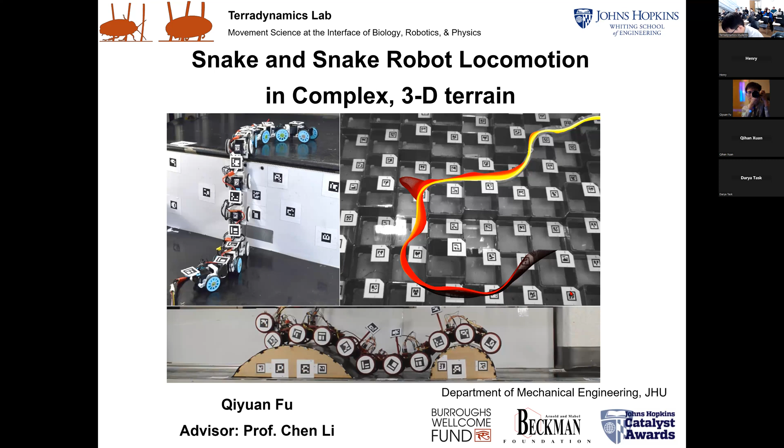And today I will defend my dissertation entitled "Snake and Snake Robot Locomotion in Complex 3D Terrain." So the reason we study snakes is because they are excellent locomotors in almost all types of complex 3D environments. And because of this, snake robots are very promising platforms to perform critical applications in these complex 3D environments, such as search and rescue, building inspection, environmental monitoring, or extraterrestrial exploration.

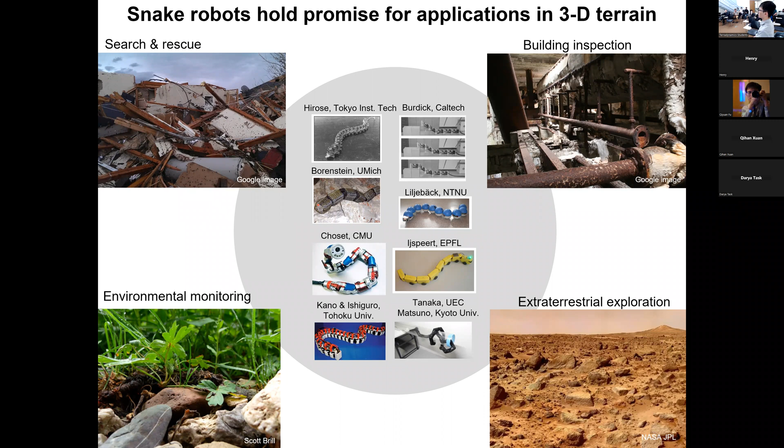Their locomotion on smooth flat surfaces has been well studied. The most famous type is called lateral undulation. The snake simply propagates a traveling wave down the body to move forward. And the secret to this type of locomotion is a special property called force anisotropy. For example, on a flat surface, there is a special anisotropic friction between the snake scales and the ground, so that the forward friction is smaller than the lateral and the backward ones.

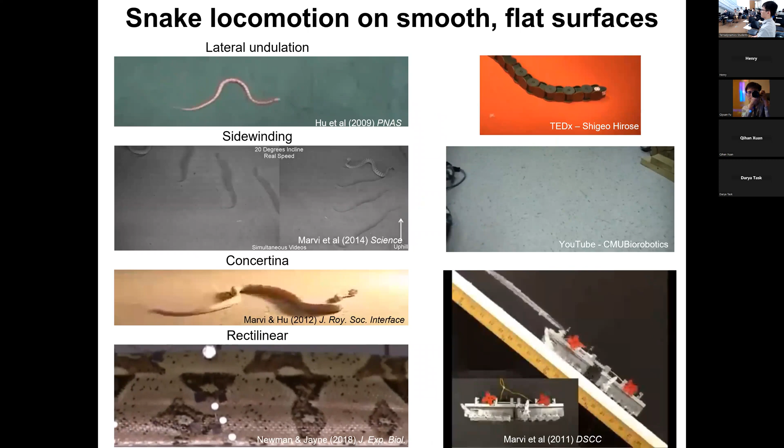And because of this, the sum of force applied to the ground by the snake points backward, so that it can move forward while doing this propagation. But they also have other ways to generate this force anisotropy, which I will introduce later. So aside from lateral undulation, they can also use alternating static contact with the ground to move forward. For example, sidewinding, concertina, or rectilinear. And because of these inspirations, snake robots can also use similar modes to traverse smooth flat surfaces relatively well.

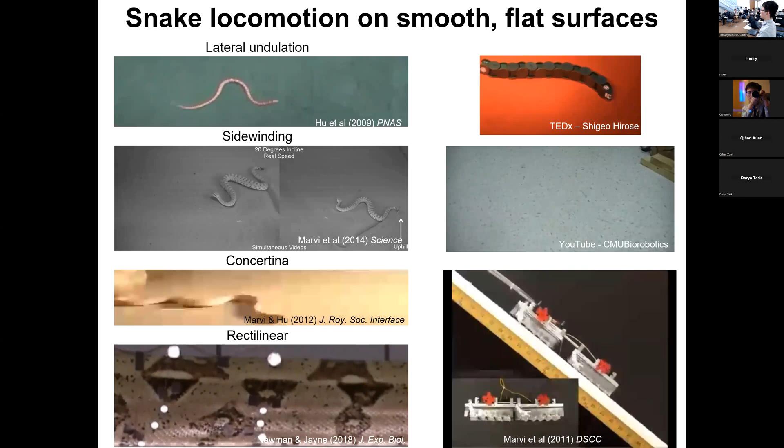And when there are vertical structures available on these flat surfaces, they can additionally utilize them to improve their performance, because they can easily get larger anisotropic force by pushing against these vertical structures. For example, when they are using lateral undulation, they can just push against these vertical posts. And when they are using concertina in a narrow tunnel with two opposing walls, they can brace against these walls for a firmer static contact, and then extend the other part of the body forward to move forward.

And because of this, the principles have been well understood and applied to many snake robots that allow the robots to traverse similar environments very well.

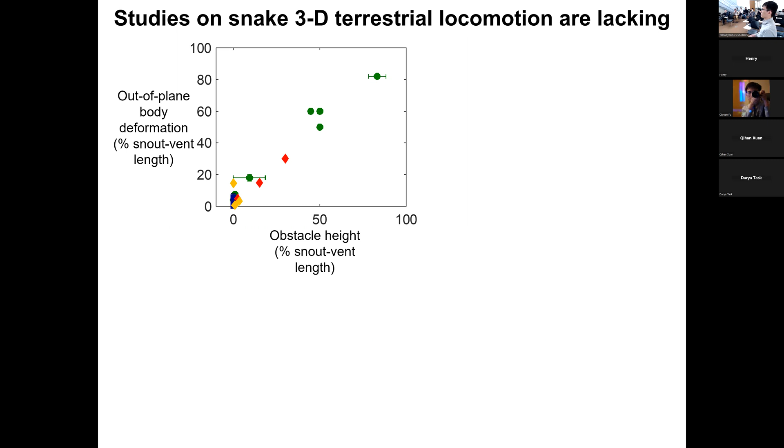However, the studies on the snake's 3D terrestrial locomotion are still lacking. Most of the previous studies focus on their terrestrial locomotion on flat surfaces, and the snakes have very small out-of-plane body deformation, usually used to reduce the friction between the body and the ground. And those that have quantified very large out-of-plane body deformation really are for their arboreal locomotion.

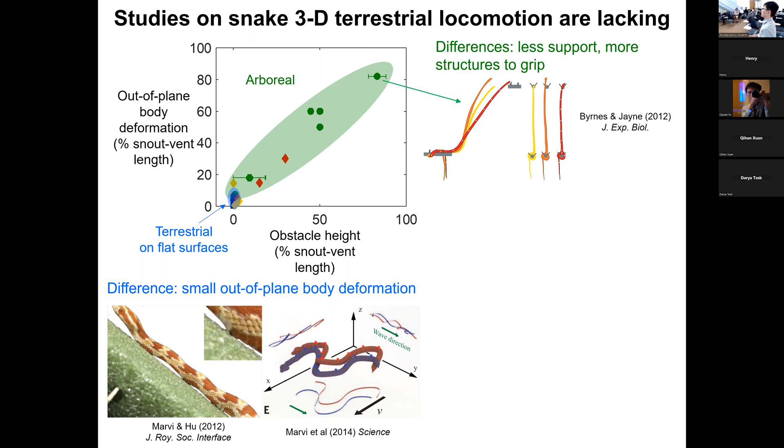And these environments are very different from the terrestrial ones, because there are fewer structures for them to support the body weight, but also more thinner structures for them to grip or wrap around for propulsion or stability. And as for the terrestrial locomotion, there are not so many studies. There are only a few from our lab and our collaborator, Henry Astley's lab, that study how they use their 3D body bending to traverse these kinds of environments with large height variation.

So because of this lack of understanding, current snake robots are still struggling in this kind of 3D terrain. Most of them use geometric motion planning dedicated to specific environments, for example, pipes or ladders, so they don't have the versatility to traverse other types of environments.

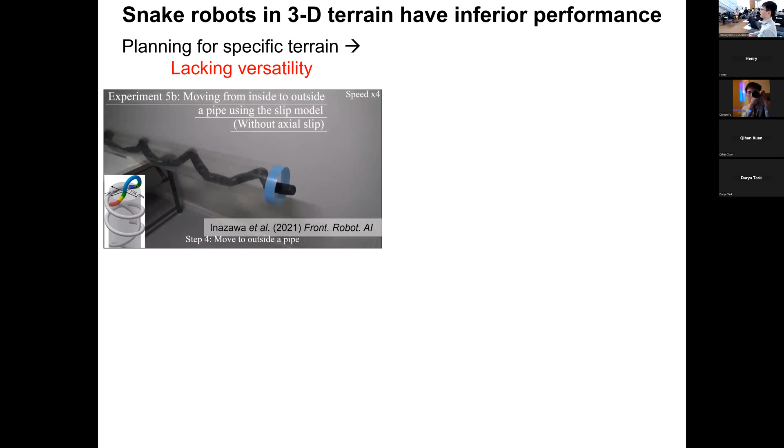And some robots are able to adapt to different terrain using controlled compliance to adapt to the height variations. However, because they are still using the gaits designed for flat surfaces for propulsion, you can see that even the best of them are still experiencing very severe slipping, and it seems that the propulsion is not large enough to overcome the resistance there.

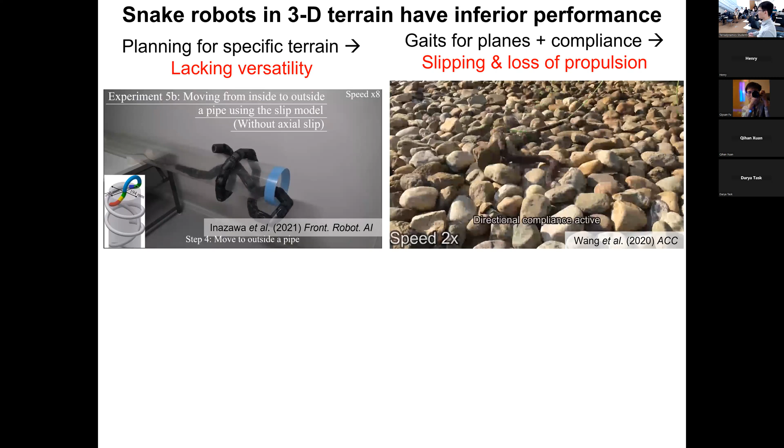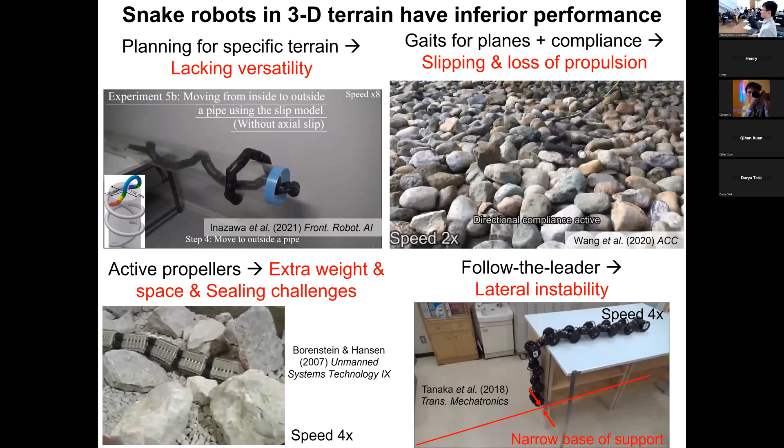So what does the additional vertical body bending induce when they are traversing 3D environments compared to their 2D locomotion? One point is that because the center of mass is raised up, there is more challenge to maintain stability. And also because a large part of the body is used for vertical bending, if they are still simply relying on lateral bending to provide propulsion, because of the shorter body section, there will be less propulsion generated, and maybe that is not sufficient.

So the overall goal of this dissertation is to understand how the vertical body bending can be used stably, and also whether it can be used for propulsion generation. And to approach this question, we studied both snakes and snake robots, in which we use snake robots as amenable physical models that allow us to test hypotheses from the observations in animal experiments, while the animals can also inspire the design of the snake robots.

And we challenge these models in 3 representative 3D environments: a large smooth step, an uneven terrain made up of blocks of random heights, and also large bumps. All of these 3 have very large height variations.

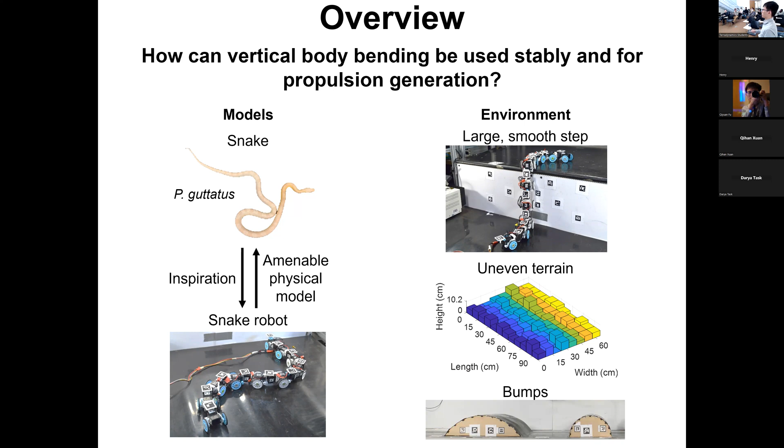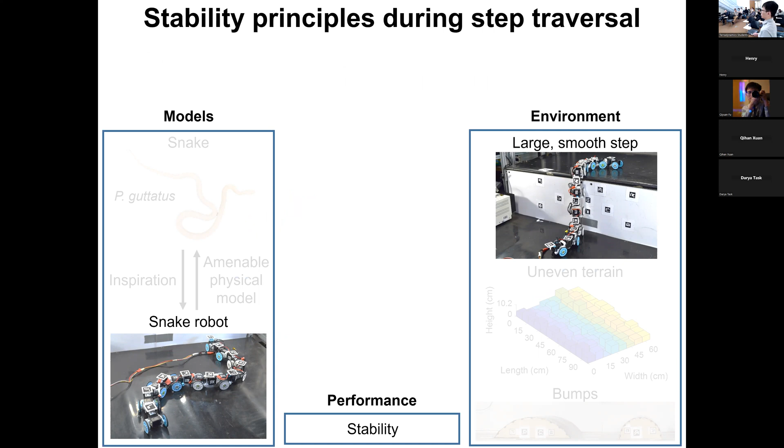And our first project studies the stability principles during the step traversal. So we challenged the robot to traverse this kind of large smooth step and see how stable it is. And what we found is that the instability increases with the amplitude of vertical body bending. We didn't test the control policy for this one, but we found that a passive mechanism of body compliance can increase the stability by improving the contact between the robot and the terrain.

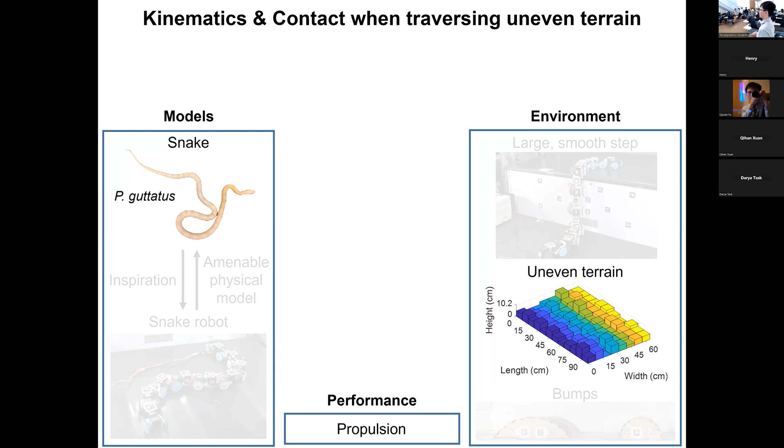And then to better understand how snakes traverse more complex 3D terrain, we tested corn snakes, a generalist snake species that lives in a variety of environments, traversing this kind of uneven 3D terrain. And then we measured their kinematics and their interaction with the terrain.

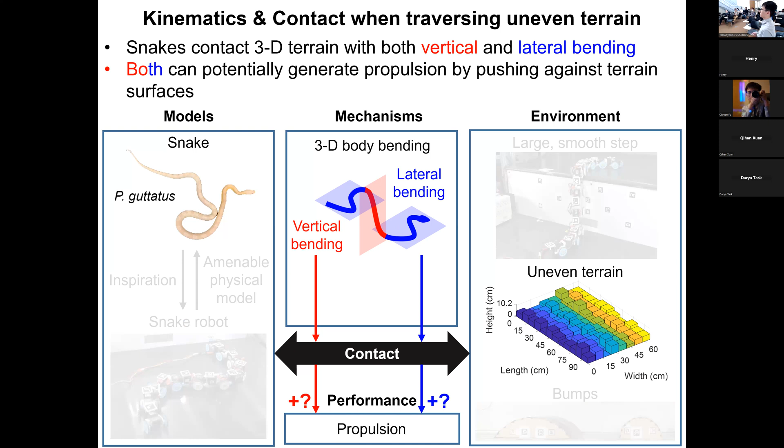And we found that they can contact the 3D terrain not only from lateral bending as previous snake robots do, but also using the vertical body bending. And there is also strong evidence that both these 2 types of body bending can contribute to propulsion by pushing against the terrain surfaces.

And finally, to understand how we can use vertical body bending to generate propulsion, we use a snake robot as a model and let it traverse these large bumps using vertical body bending only. And we found that by propagating a shape down the body, it can generate sufficient propulsion to overcome resistance such as friction or other external forces just by pushing against this uneven terrain.

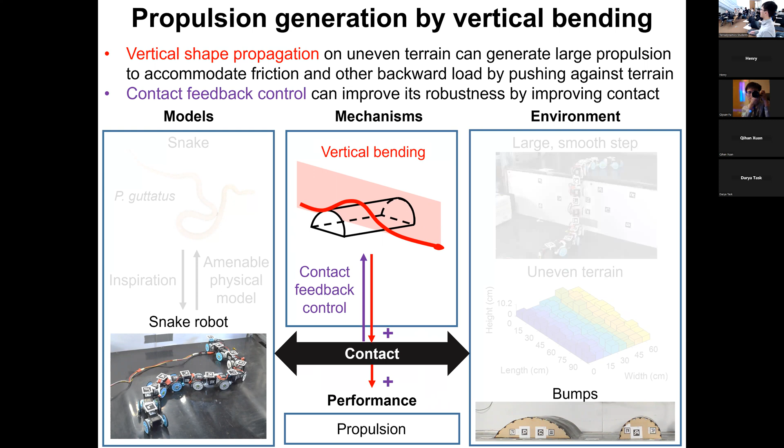And when we add contact feedback control to the robot, it can improve the robustness of this strategy against unexpected perturbations that cause loss of contact, by regaining the lost contact and then maintaining the propulsion and the success rate. And then I will first talk about our first project, which studies the stability principles during step traversal.

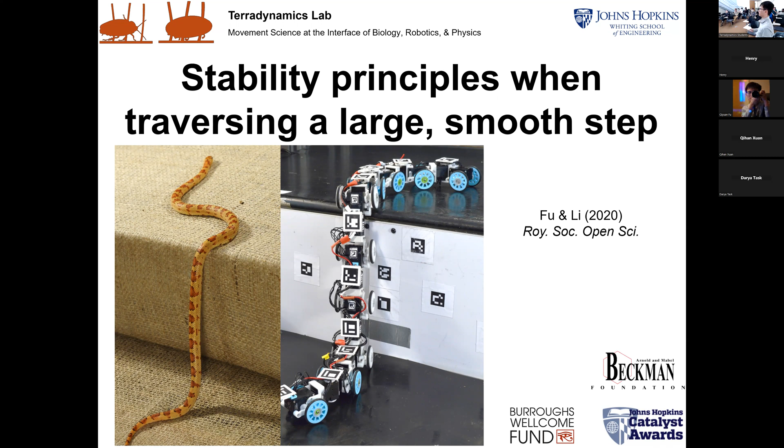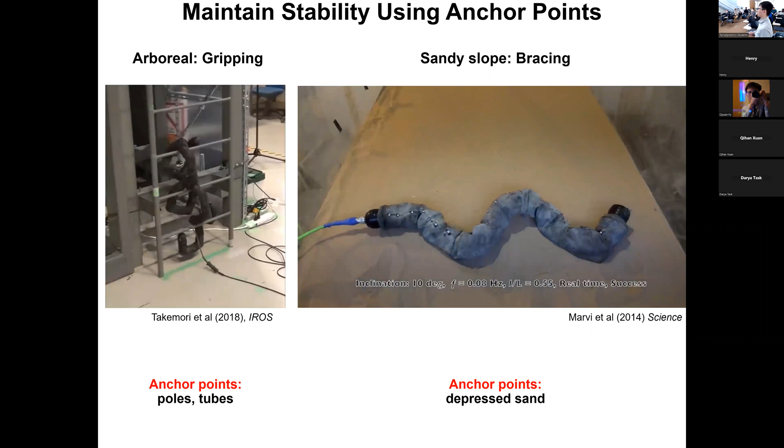And as I mentioned just now, on flat surfaces, snakes are able to move forward using near 2D body bending, which is inherently stable because of the very low center of mass. But when they use 3D body bending, it causes some stability challenges, as you can see on this robot using sidewinding to move up a slope. And in some environments, they are able to maintain stability using anchor points. For example, in arboreal environments, they can grip these horizontal rods for stability. And on this sandy slope, they can push against the depressed sand for stability.

But there are also environments where the obstacles are too large and smooth for them to gain such anchor points, for example, over a large boulder or over a fallen tree, but still snakes can traverse these environments. And how do they do that? Our previous work found that they are able to use a partitioned gait to traverse these kinds of environments. They tested it using kingsnakes, a kind of generalist snake.

And the partitioned gait is that they partition the body into 3 sections. The anterior and the posterior sections use lateral undulation on horizontal surfaces for propulsion, and the middle section cantilevers in a vertical plane to bridge the height difference. And when the snake is moving upward, these entire patterns travel down the body.

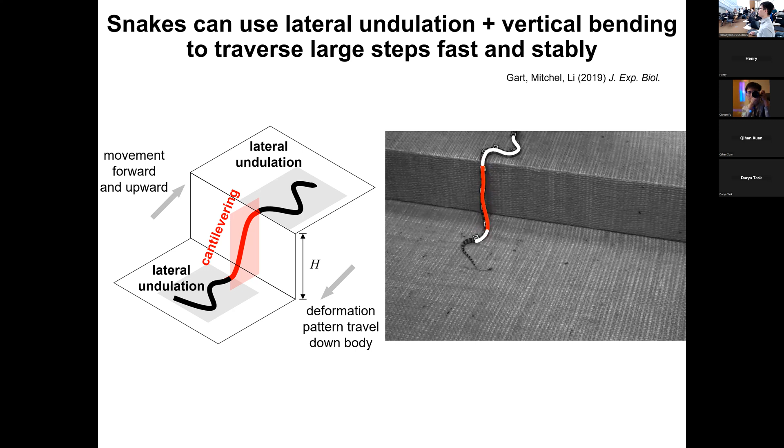And because of this combination, they have a much wider base of support compared to most of the previous snake robots that have tried traversing similar terrain. This allows them to traverse much faster than the previous snake robots, and also with 100% stability in all 120 trials.

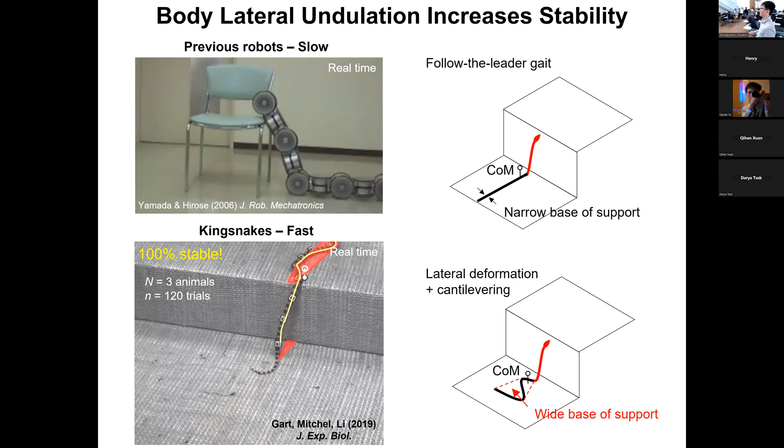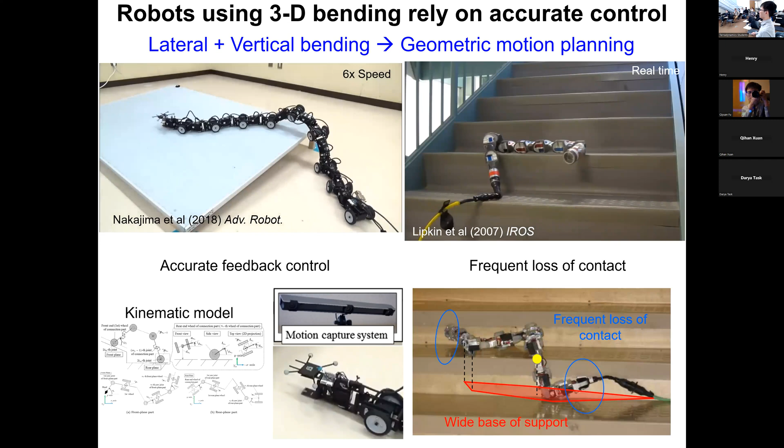And there are indeed some robots that have tried combining lateral and vertical body bending to traverse similar environments, but they rely on very accurate feedback control to maintain good contact between the robot and the terrain, even for a very low step. Otherwise, they will frequently lose contact with the terrain.

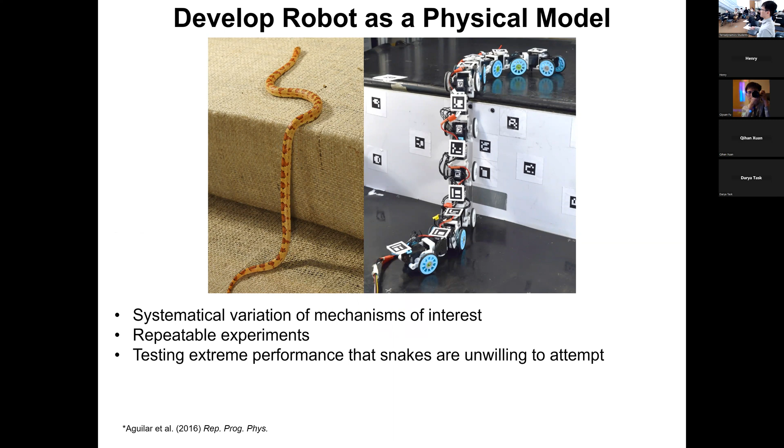And to better understand the stability principles for these kinds of locomotors when they're traversing this large smooth step, we developed the robot as a physical model. As I mentioned, this has the benefit of allowing systematic variation of mechanisms of interest, for example, the controllers or some other mechanisms that we mention later. And this allows us to do repeatable experiments and also test environments that the snakes are unwilling to attempt. For example, for very high steps, we can't get the snakes to traverse them.

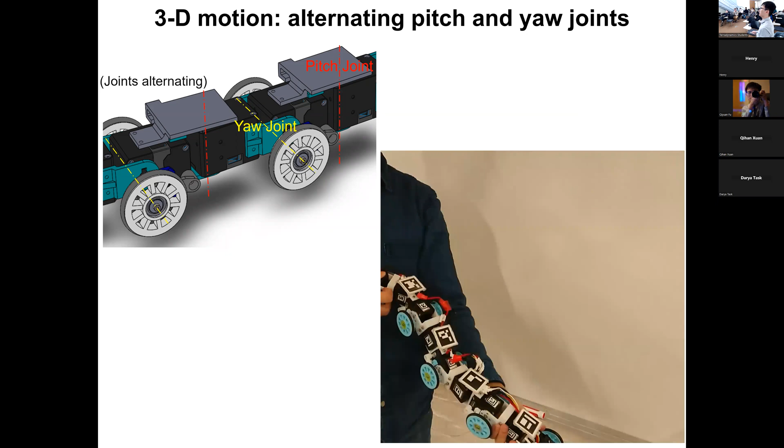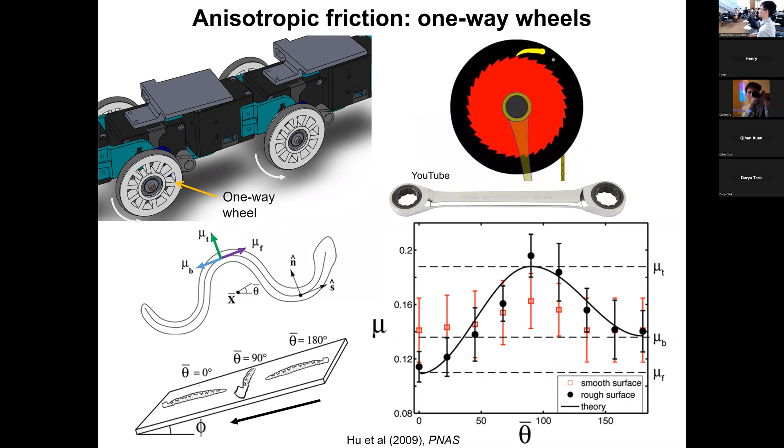And this also provides direct examples of future application and many other benefits, which recently have resulted in a large number of discoveries about animal locomotion. So the snake robot we use has alternating pitch and yaw joints so that it can bend in 3D. And it is also equipped with one-way wheels to produce the anisotropic friction property that is necessary for it to generate propulsion on a flat surface using lateral undulation. So it has a smaller forward friction compared to backward and lateral ones.

And then we applied the partitioned gait to the robot, using 3 markers to tell the robot the step height and the distance between the head and the step. And with this gait, the robot is able to climb up a step that is similarly high as those that can be traversed by the animals in our previous experiments.

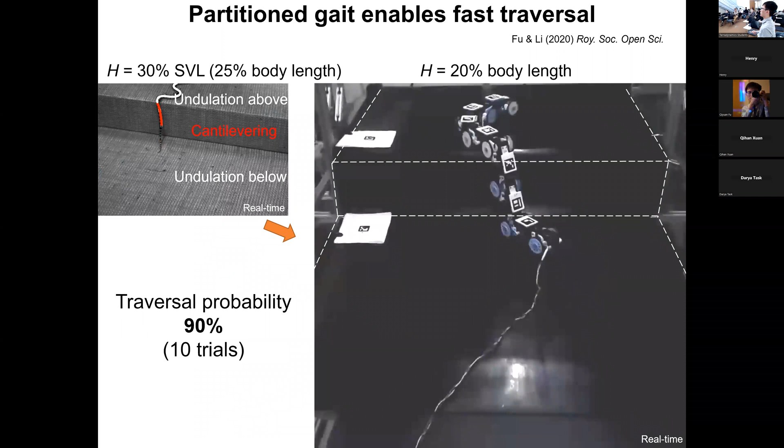However, when we challenged the robot with an even higher step, we found that the robot fails more often and the traversal probability drops a lot. You can see from the video here, it lost contact with the ground and then rolled to one side, and often, eventually it will flip over and fail.

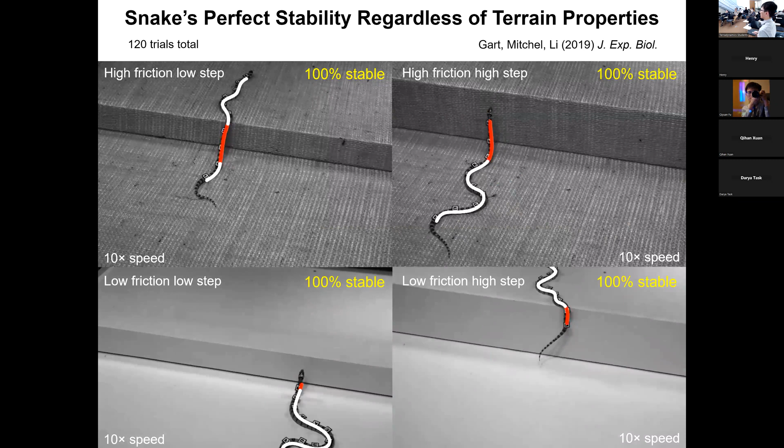So recall that the snakes can maintain 100% stability during the traversal for every type of environment that our previous lab members tested. So what is still missing here? And one thing that came to our mind is that the snake body is very compliant, but our robot at that time was a rigid body robot. So could this body compliance be an important factor that can improve the performance?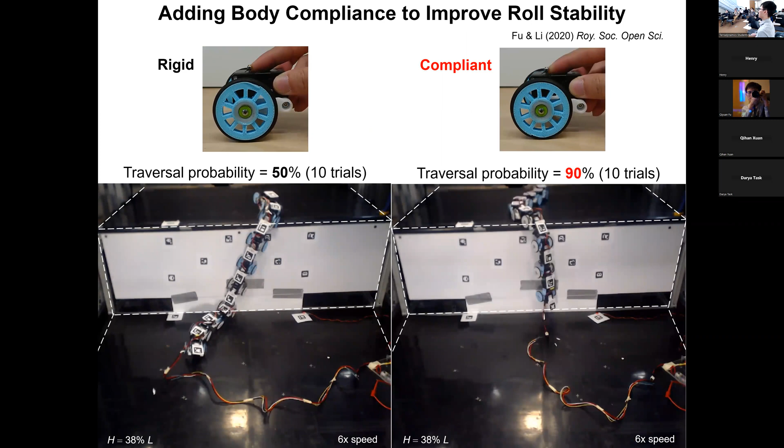And to test it, we added a car-like suspension system between the wheel and the body so that the robot can switch between a rigid body robot or a compliant body robot. Then we compare the performance of the robot with only this change, and all the other controllers, etc., are the same. And the compliant body robot is able to traverse the same step with a much higher traversal probability.

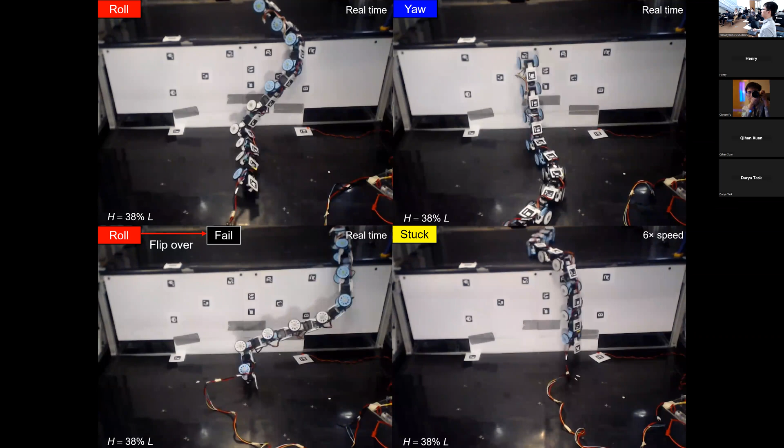And to really figure out if it is because the body compliance increases stability, we looked into several adversarial events during the traversal. There are 3 types mainly. The first is called rolling. It rolls to one side. Sometimes it can recover, but sometimes it will flip over. And the more this situation happens, the more roll instability the robot has. And there are also 2 other events in which it will change its direction or get stuck on the edge.

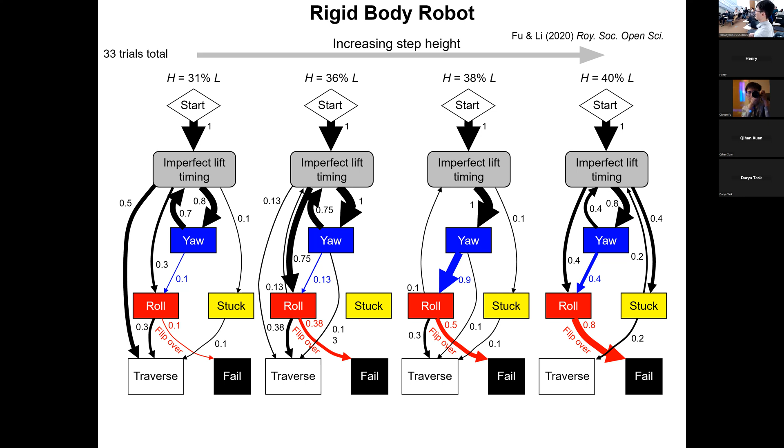Red is the compliant one? Yes, red is the compliant. Yeah.

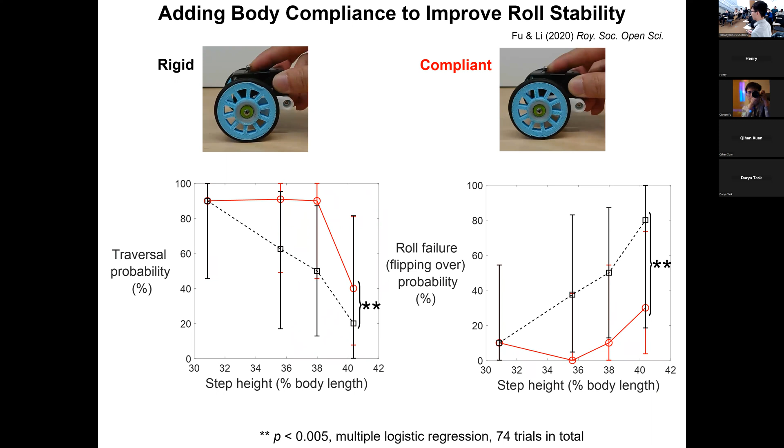Okay, and also if you have any questions, please feel free to ask. Remember that part, the compliance? You added the compliance and improved performance, but do you have insight into why? So we analyzed the contact between the robot and the terrain as well, in which the body compliance increases the contact, which means that it can make the support polygon larger, which gives it more stability. That's our explanation.

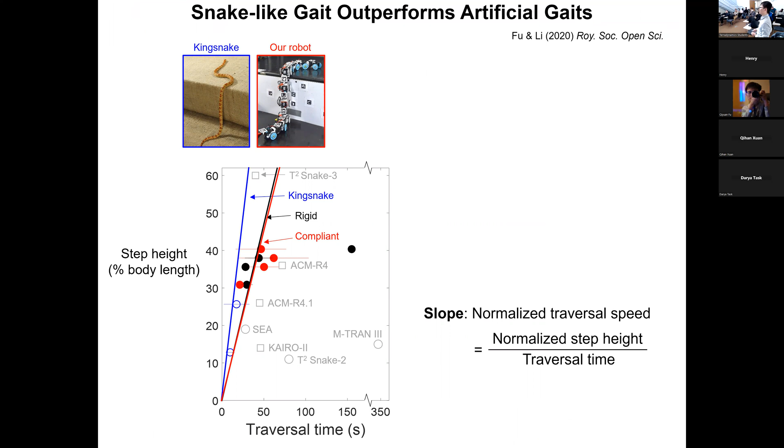Okay, and then I'll move on to our second project, in which we are interested in how the animals traverse these complex living environments. So, as I mentioned in the beginning, the propulsion can be generated by either the kinetic friction or the static friction between the body and the ground when they are on a horizontal surface without any vertical protrusions. And once there are these vertical structures, they can also push against them for a larger normal contact force to move forward. And because they are flat surfaces, they do this by using lateral body bending.

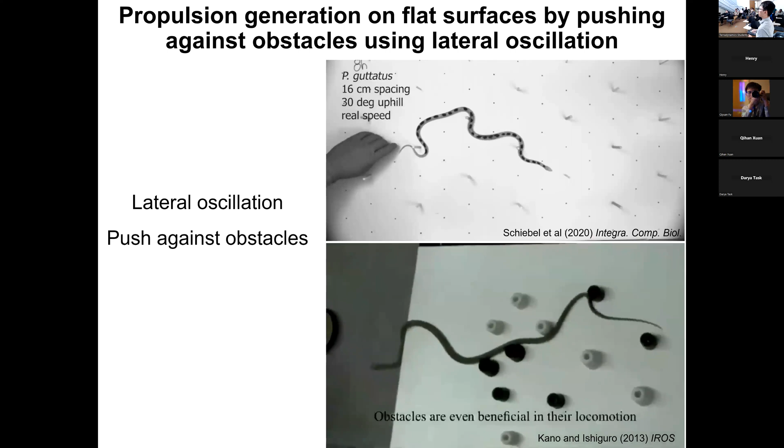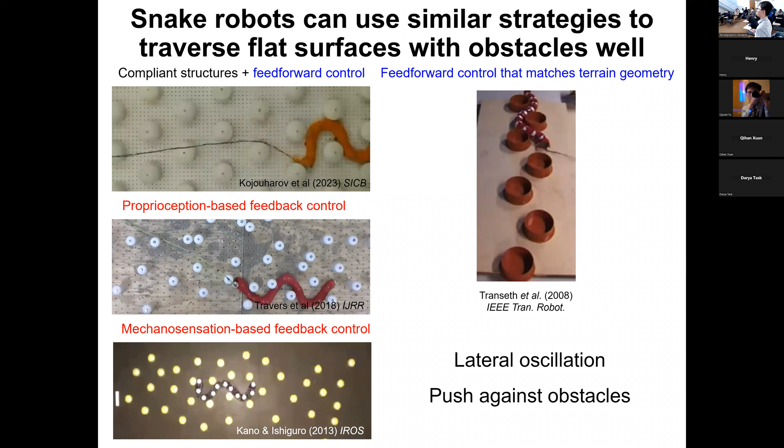And inspired by this, many snake robots are able to use lateral body bending to push against obstacles to move forward in similar environments. However, when they're trying to use these strategies on an uneven 3D terrain, they slipped a lot and seem to not generate enough propulsion to move forward.

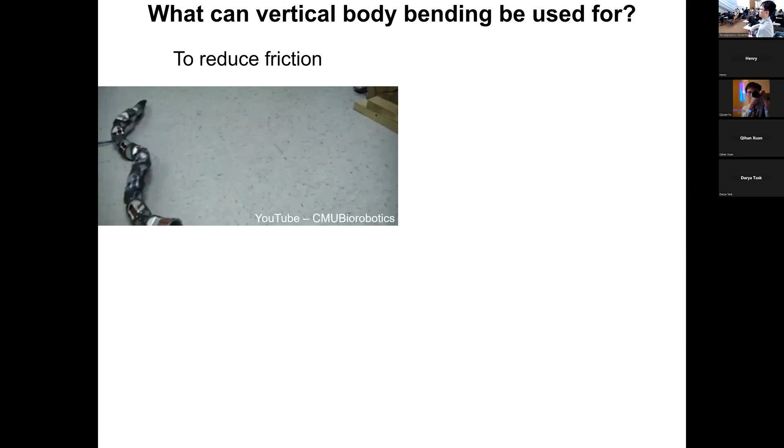So then we wonder, aside from lateral body bending, what can the vertical body bending be used for? And in the previous robots, it is used either to reduce friction, to lift the body off the ground and move laterally, or to connect propulsive body segments like these two undulating segments. Or a more common way is to use controlled compliance to let the body bend vertically to maintain contact with the ground.

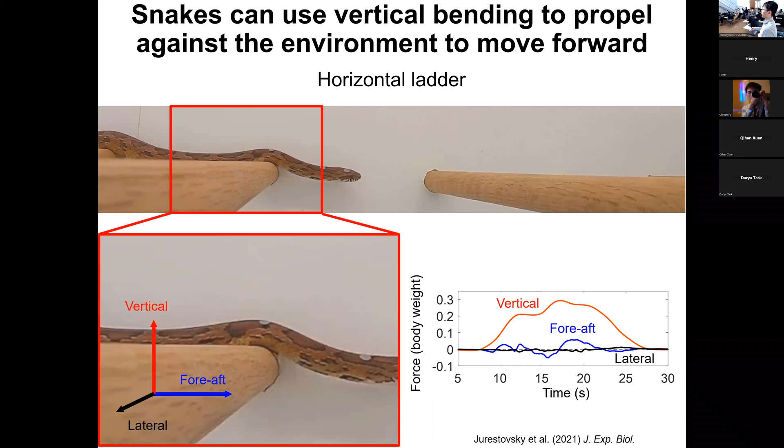But in addition to this, our collaborator Henry's lab also found that they can generate propulsion by using vertical body bending, just by pushing against these horizontal structures. For example, they measured the reaction forces applied to the snake from this horizontal rod, and they found that there is very little lateral force component, and also the snake is not using the lateral bending much. In contrast, the vertical and the fore-aft forces are very large, and also they can manipulate the force to be propulsive or for braking. Maybe they are coordinating these forces on multiple rods.

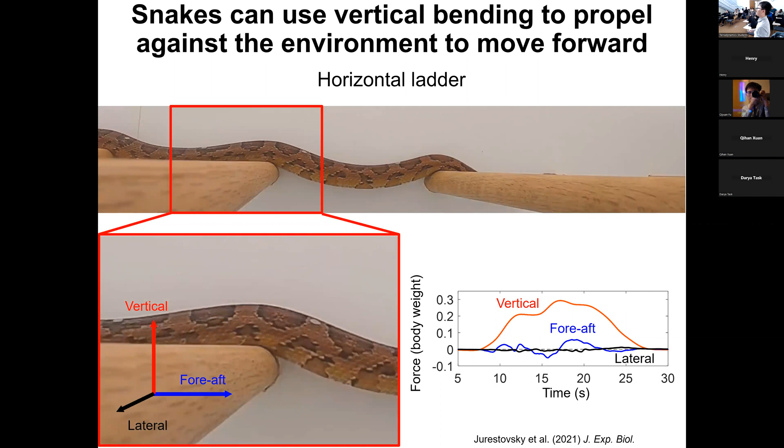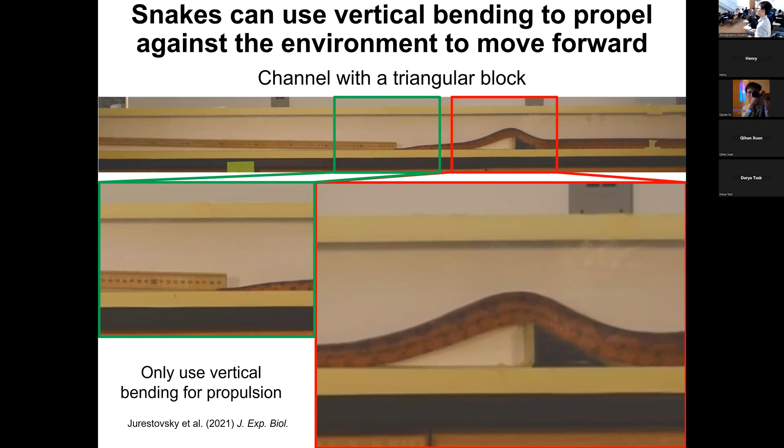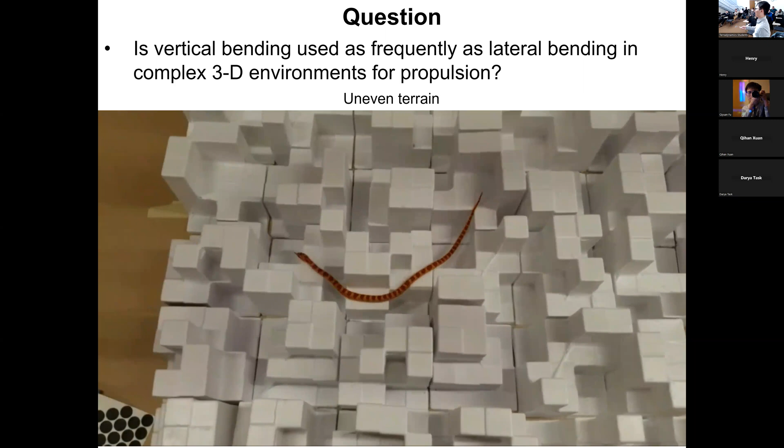So in these simple environments, they don't have the lateral structure that they can use lateral bending to push against, except that narrow channel. But for a more complex 3D environment, which has both the lateral structures and the structures below the body, what do they do? Like the snake robots before, do they just use lateral body bending, or do they also use vertical bending a lot?

So to understand this question, we constructed an arena, which is constructed by these low friction acrylic blocks, so that it's not very likely for them to use lateral undulation and anisotropic force, because we measured the friction and the anisotropy was not very significant. And then the height of each block follows a normal distribution and is randomly distributed around the terrain.

And we attach markers to each block and use 12 cameras to track them so that we know the 3D position and geometry of these blocks. And then we put snakes inside and track their kinematics. And to track the continuous kinematics of the entire snake, we use a custom method that has a higher accuracy than the commonly used B-spline method.

And to do so, we first attach these small marker beads to the snake. Then we first got the 3D position and orientation of each marker. And then for each body section in between two markers, we simplify it as an elastic rod subject to the end constraints from these markers. And then we can interpolate the continuous body in between.

So first, we found that they are doing amazingly well in this terrain, even if the friction is very low, and also it's a complex 3D environment. They do so by propagating a shape down the body as if moving in a virtual tube, and the slipping angle was as small as 14 degrees.

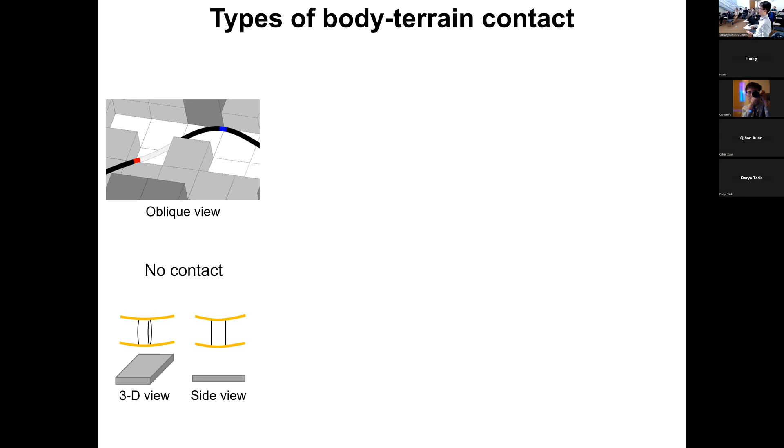And we further assume the direction of the reaction forces. There will be a normal contact force that's normal to this surface, or we'll assume that it has the same angle between these two surfaces. And then there will be a friction, although very small, that is opposite to the local movement direction.

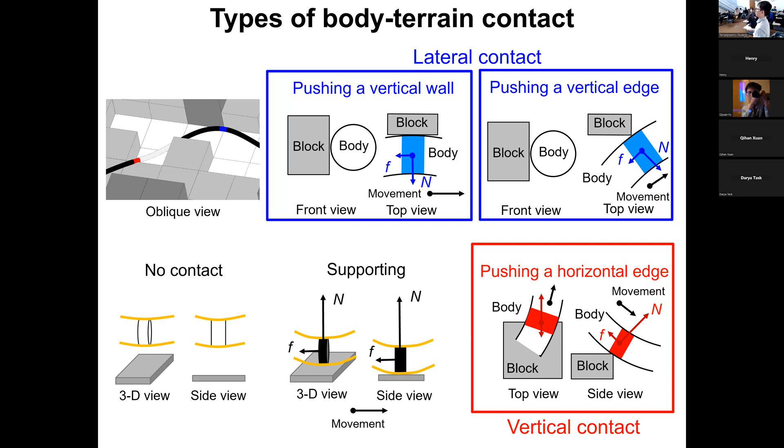And also, it's possible for the body to contact the structures below the body, for example, by sitting on a horizontal surface or by pushing against a horizontal edge. Because the friction was very small, we are particularly interested in these three types of interactions, in which these two are likely to generate propulsion using lateral body bending to push against structures, and this one can likely generate propulsion by pushing against these horizontal edges. And we call them lateral contact and vertical contact later.

And in fact, we counted the number of these contact regions along the entire body, and averaged it for all the time frames and also in all the trials. We found that the number of contact regions are actually more for vertical body bending than for the lateral body bending. But still, the numbers don't necessarily mean they are contributing to propulsion. They may also be used for braking.

So we wonder how much do these contact regions really contribute to the propulsion that's aligned with the movement direction. And remember that we just assume the force direction, and we further use them to define these contact regions as potentially propulsive ones or not. So we do that by looking at the angle between the assumed force and the center of mass velocity of the entire snake, which can represent its movement direction.

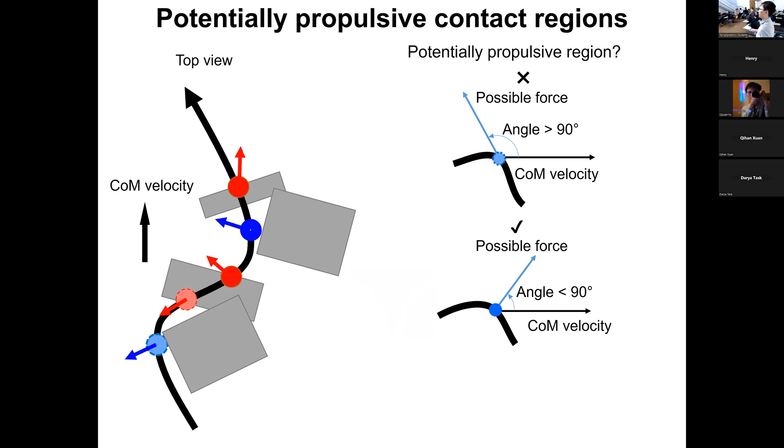And if the angle is smaller than 90 degrees, we say it's potentially propulsive, so that we can count the number of all these potentially propulsive contact regions along the body, which can somehow indicate the potential of generating propulsion from lateral or vertical body bending. So, for example, here there are two vertical contact regions that can potentially generate propulsion, and there is one for lateral body bending.

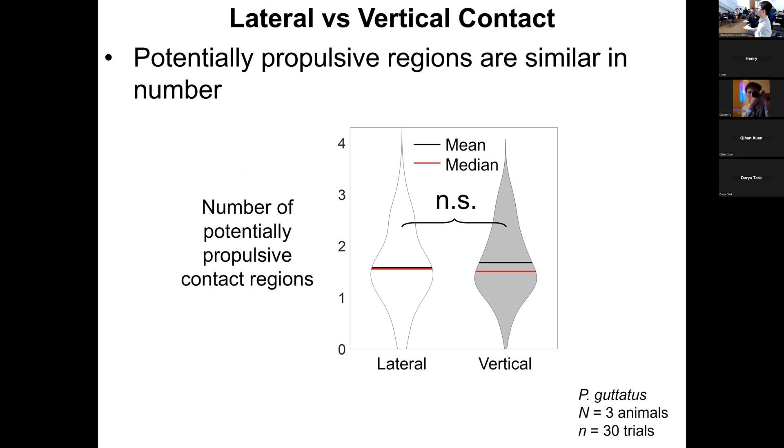And then similarly, we counted the number of these potentially propulsive contact regions, and we found that they are actually similar for both lateral and vertical body bending. So what does this tell us? This means that if the snake is able to combine lateral and vertical body bending for propulsion, they are likely to increase the number of push points available. For example, they can use them to coordinate forces for either propulsion or for turning or maneuvering, which will give it a lot more redundancy.

So, for example, at this moment, if it only uses lateral body bending like previous snake robots, it currently only has one point available, and needs to slip laterally more to get some more points either to maintain the direction or for larger propulsion. But if it's also able to use these vertical contact points for propulsion, then it has a lot more redundancy in coordinating the force.

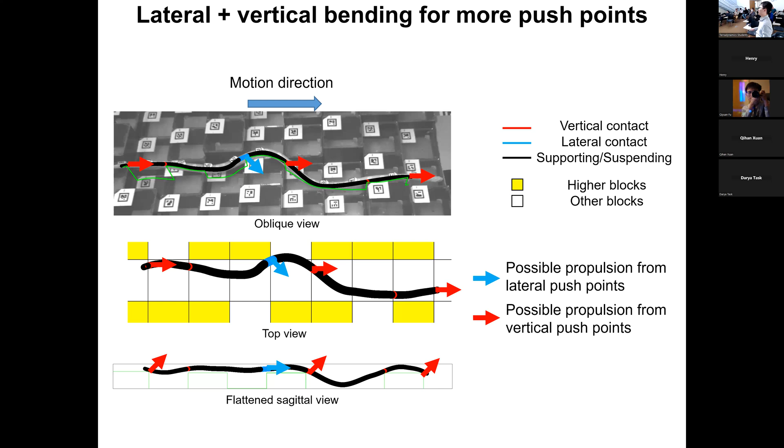Okay, and that's all for my second project. If you have any questions.

Okay, and then I'll move on to my third project, in which we would like to understand how vertical body bending can really generate propulsion effectively, and also how we can control this vertical body bending, potentially with some feedback control to improve the performance.

Snakes are able to use vertical body bending for propulsion, and so do some snake robots, but they are currently lacking the versatility to adapt to different environments, because they are either designed and tested for dedicated environments manually, or need manual control of the heading or to switch the mode, which is quite important for them to generate sufficient propulsion. And there is only one case in which they can use feedback control to adapt to different terrain, but they derived the model using a very ideal assumption that ignores any longitudinal resistance and gravity.

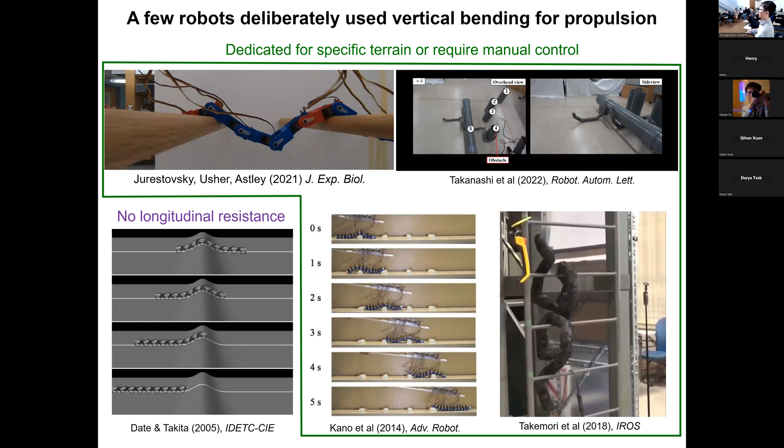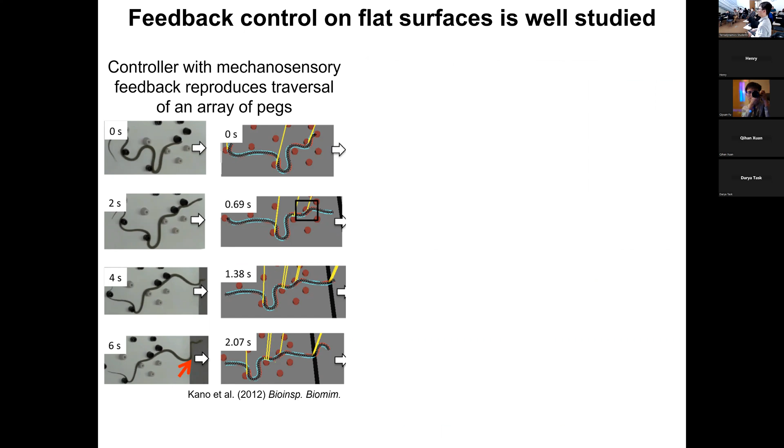And indeed, the principles have been well studied, and people are able to reproduce the traversal of an array of posts using sensory feedback control, using the contact information and also the bending shape information. And then people can apply these strategies to robots to let them traverse similar environments automatically using these principles.

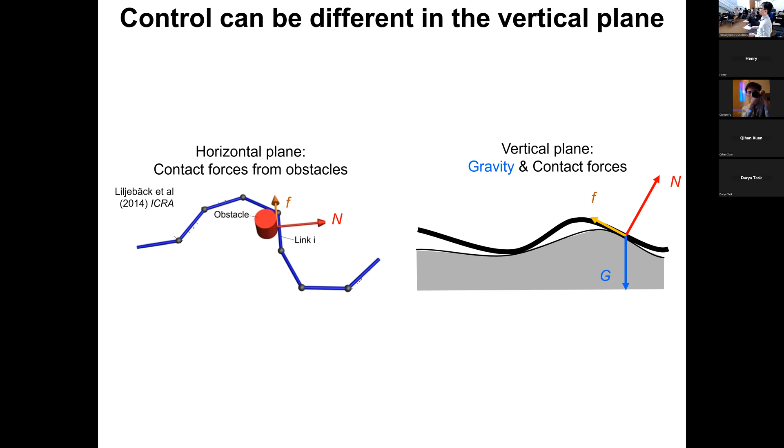However, the control policy can be different in the vertical plane, because on the horizontal plane you mainly need to consider the contact forces between the body and the obstacles. But in the vertical plane, you additionally need to consider gravity, which can significantly affect the performance of the robot. So our question for this project is, when can vertical body bending effectively generate propulsion? And also, how can feedback control help improve the performance in the vertical plane?

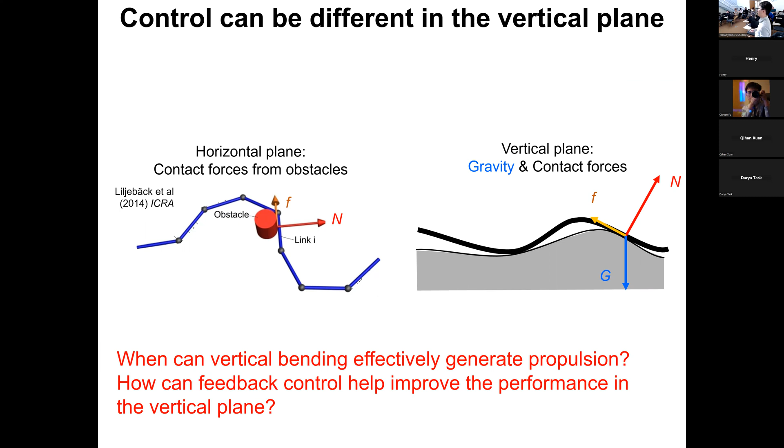And again, to test it, it's not likely for us to test it on snakes because they have very complex structures that have not been well understood yet. So we again used a robophysical model, which can bend in the vertical plane. It has passive wheels, which reduce the friction and also allow us to install force sensors between the wheels and the body to measure the normal contact force for feedback control.

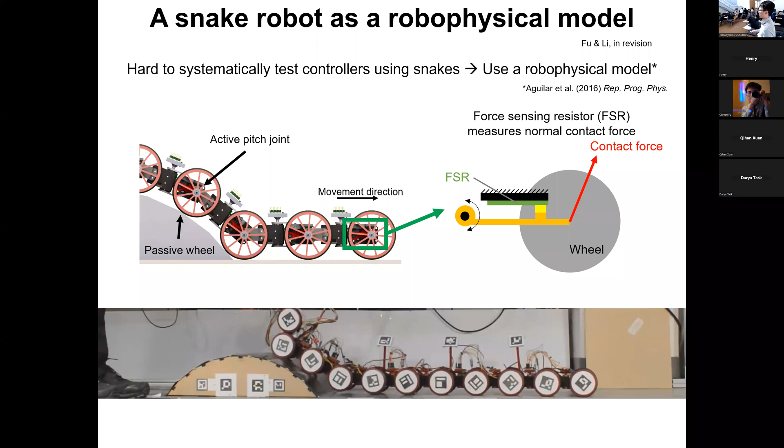And then we let it traverse a track with large bumps, which produce a large height variation, using vertical body bending. To understand the control policies, we tested 4 different controllers. The first one is the simplest feedforward controller that propagates a predetermined shape down the body. This is inspired by the fact that the snake seemingly just propagates the shape without any change down the body.

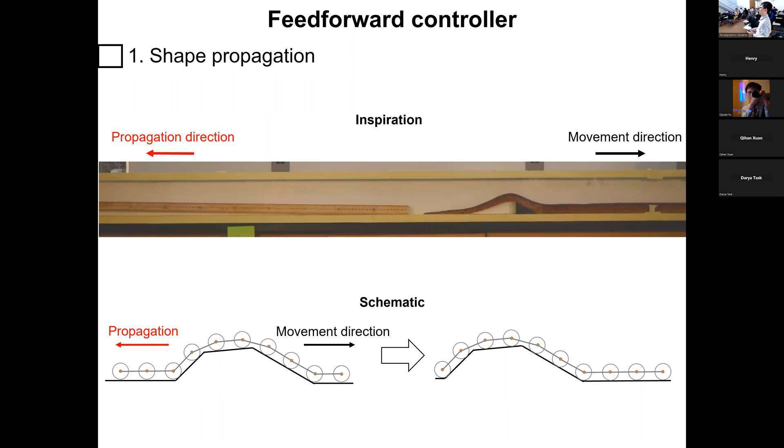And then we have 2 feedback controllers, which aside from propagating the shape, also control the head to adapt to the terrain. This is inspired by the observation that the snake seems to move its head laterally and dorsoventrally more, as if exploring a path, while the rest of the body simply follows the head. These 2 controllers are slightly different in the implementation. This blue one senses the contact force at the first wheel and controls the angle of the first joint to try to maintain its force using a controller.

And the second one just constantly pushes the head downward with a constant torque. For the propagation, they both read the current shape of the body so that they can propagate the shape down the body. But this one uses position control for each joint, which controls the shape, and this one controls the torque instead, which automatically has some ability to conform to different terrain.

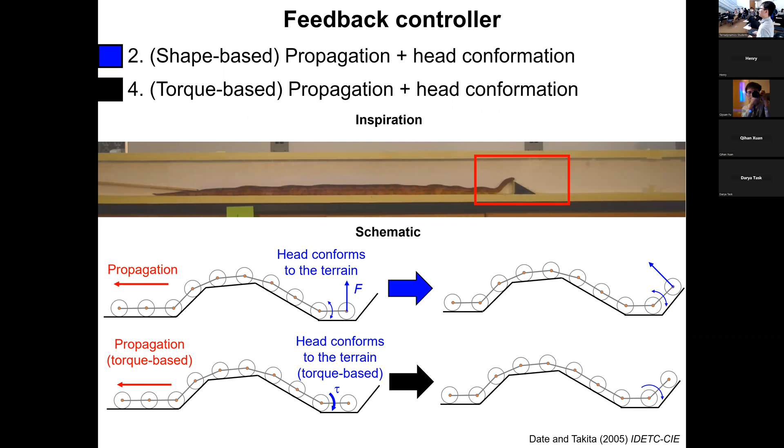And for the last controller, we tried to use more information from the entire body. Basically, it senses the contact over the entire body and controls the body to deform downward to be in contact with the ground while propagating the shape down the body. This is inspired by the observation that sometimes the snake can change its body shape to be different from its head trajectory in some environments that have very large slipping.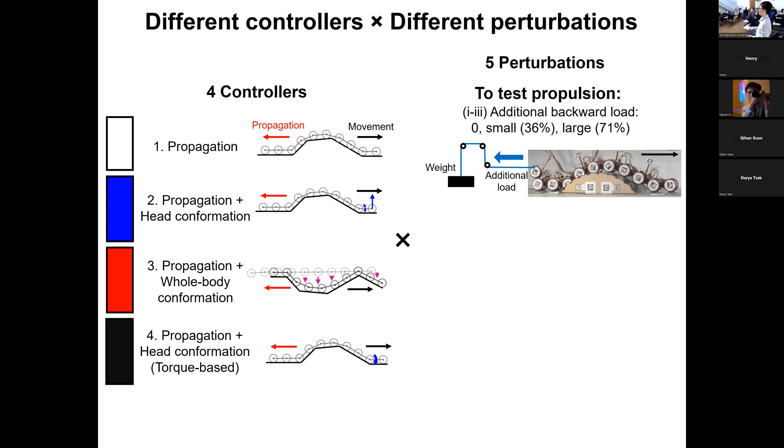Then we tested these controllers on different perturbations to test their performance. The first 3 types of perturbations added different additional backward loads using a pulley system, ranging from 0 to 70% of the total friction when it's lying on horizontal ground. We wanted to use these perturbations to test how large a propulsion the robot can generate using different controllers.

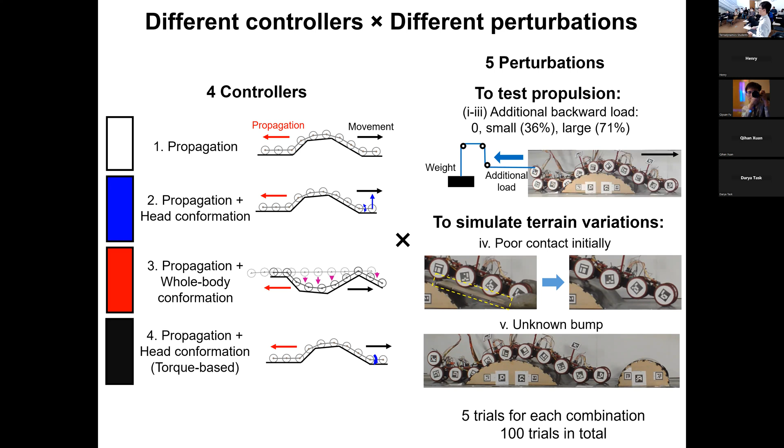And then, to simulate their ability to adapt to different environments, we added 2 other perturbations that either let the robot lose important contact with the ground, or added another unknown bump in front of it to see if it can adapt to it. For each combination, we collected 5 trials, resulting in 100 trials in total. And here's what we found.

First of all, the conditions for vertical body bending to generate large propulsion. First, it can do it by continuously propagating a shape down the body. For example, in this trial, even under a very large backward resistance, it can traverse the entire bump successfully by propagating a shape. But in this trial, because the torque is limited by the controller, it cannot propagate the entire shape down the body, so it stops here and gets distorted. So the robot got stuck here even with no external load at all.

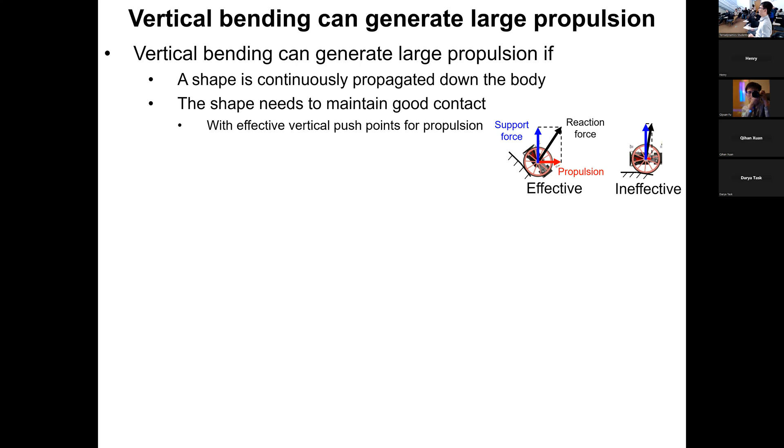Secondly, this shape has to maintain very good contact with effective vertical push points, basically very steep surfaces that can effectively convert the normal reaction forces to propulsion. For example, in this trial, this controller lost contact with the steep surfaces and can only push against these nearly flat surfaces, and does not have enough propulsion to overcome the resistance, so it got stuck halfway in the track.

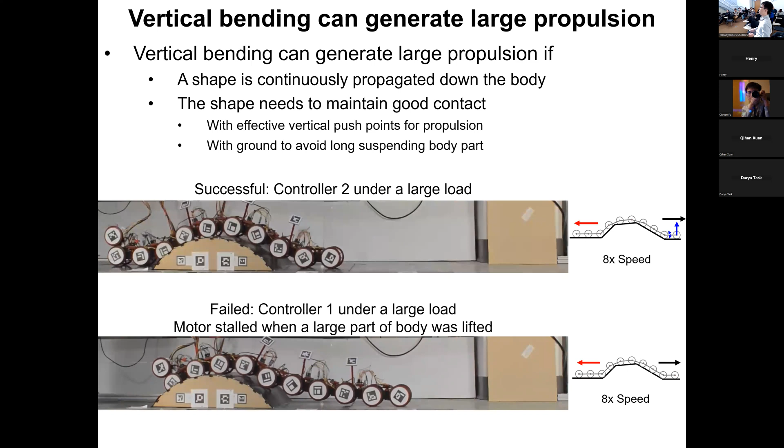Thirdly, it has to maintain sufficient contact with the ground so that it does not overload the motor. As you can see here, this robot is lifting too long a body section, which stalls the motor, and it failed. If we look at all the trials, these trials in green boxes have very small lift-off height, which means very good contact with the ground, and also a high success rate, which means that trials satisfying these conditions can be successful even under large additional load, for example, this condition 3.

And how does contact feedback control help here? As you can see, most of the failure results in loss of contact, which is a common behavior for these feedforward controllers when there are unexpected perturbations. And by sensing the lost contact here, feedback controllers can let the robot regain the lost contact, and then it can maintain the propulsion and also won't have the issue of motor stalling.

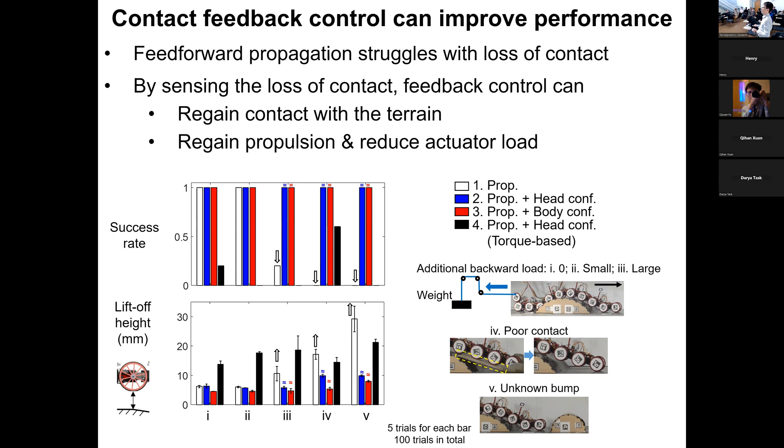And finally, if we look at all the trials here, for these 3 especially challenging conditions, the feedforward controller lost more and more contact, and then results in low success rate. And for the feedback controllers, especially the 2 and 3 here, they can reduce the lift-off height, which means that it improves the contact, and then can still maintain a high success rate for all these trials.

And finally, as a summary, this project discovers several mechanisms that can affect the performance of this snake-like 3D locomotion, mostly by affecting the contact between the body and the environment. For example, for the 3D body bending here, the larger the vertical body bending, the more the roll instability. But the vertical body bending can also contribute to propulsion by pushing against the terrain.

And for the lateral body bending here, even in 3D environment, snakes are also using them for propulsion by pushing against the terrain. And then by adding contact feedback control, we can improve the performance of these propulsion generation strategies by improving the contact between the body and the terrain. And finally, aside from these control policies, there are also passive mechanisms like body compliance, which can improve the performance, such as stability, by improving the contact between the snake body and the environment.

And there is still more to understand for this snake-like 3D locomotion, and it's promising to further integrate biology, robotics, and theoretical models to understand it. For example, animal experiments can provide a lot of inspiration for the other 2 aspects, and the robots can provide amenable physical models to test different hypotheses and also to validate these theoretical models. And the theoretical models are an abstract explanation of all these complex phenomena observed in animal experiments, and also can guide the design of more efficient robots.

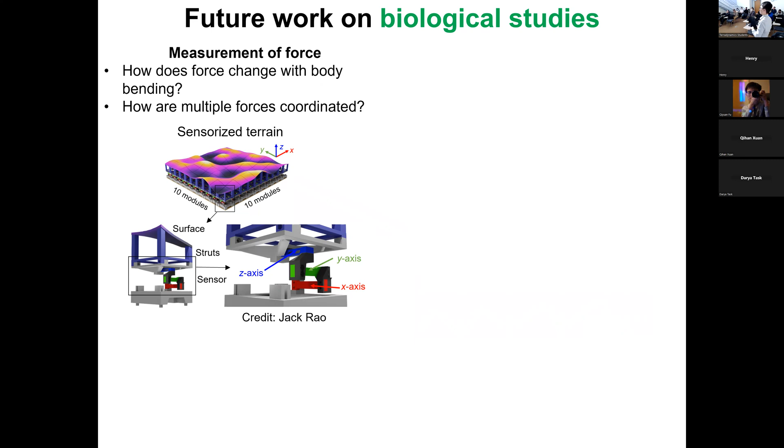And then we can also measure the muscle or neural activities to better understand the biomechanics. For example, unlike most snake robots that bend a single joint using one single motor, a snake has muscle groups that span over dozens of joints. So does this structure give it more advantages, or does it have some other purposes? Maybe these experiments can help. And also, it will be helpful to directly measure the neural signals so that we can understand how the snake responds to different feedback.

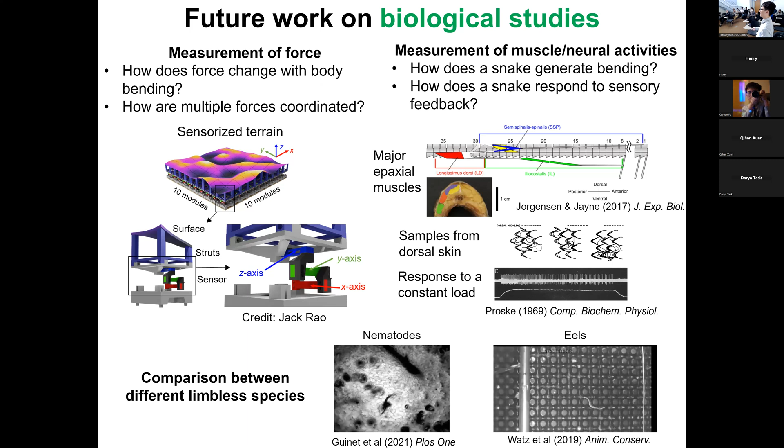And it will also be interesting to compare snakes with other limbless species, for example, nematodes or eels, which can also use the bending of their elongate body to traverse complex environments. And for the robot, it will be helpful to develop a compliant and continuum robot so that it won't get stuck by different asperities in complex 3D environments like the wheeled ones. This is one that we are developing, which has a rigid skeleton and a compliant shell that can adapt to the terrain, and has compliant force sensors that can measure the contact forces.

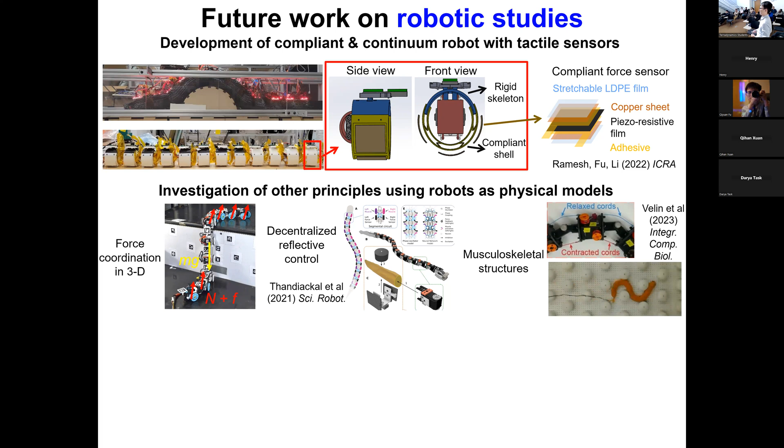And we can use them to investigate some problems like how to coordinate the forces in 3D, and whether a decentralized control structure can save communication bandwidth for faster response, or can these musculoskeletal models inspire some simple mechanisms? For example, this one used bilaterally actuating muscles, which can produce this traversal behavior with a feedforward control. And then finally, we can try to apply them in more complex real-world environments.

And also, there is more to work on on the theoretical modeling side, which I didn't touch here. For example, using an elastic rod to describe the snake body and to investigate the contact mechanics between the continuous body and the terrain.

And also, we can develop models for their neuromechanical structures. For example, there might be different levels in charge of different things, like a central controller to coordinate high-level tasks, and some local controllers to generate simple behaviors like the propagation. And also, mechanical properties can be important, as shown in the first project. Maybe the compliance can improve the contact, or some one-way mechanism can increase the propulsion.

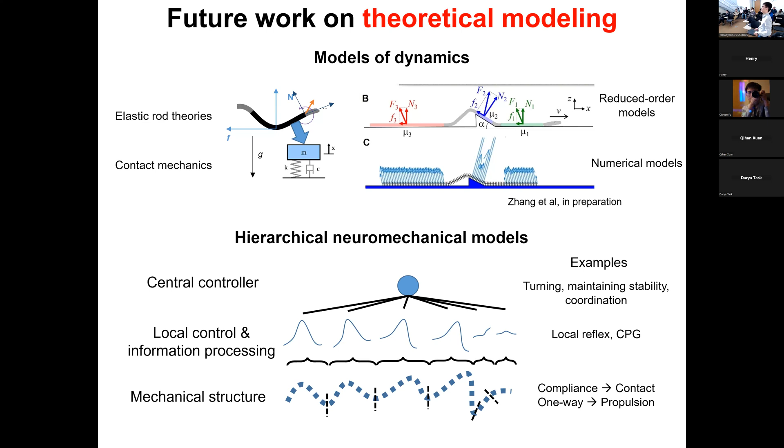And finally, I would like to thank all the people that contributed to these projects. First of all, my advisor, Chen Li, for teaching me a lot on how to do rigorous scientific research, and also providing me with a lot of help, not only on research, but also in daily life, especially during the pandemic. And thanks to all my co-authors for contributing substantially to this work, and also providing many insightful suggestions. Thanks to the readers for reading the dissertation and providing feedback, and my lab members for creating a very vibrant atmosphere in the lab to motivate me, and also to provide helpful discussions to improve my work. There are more that I cannot include here, and I apologize for that. Oh, and also the funding resources that supported this project.

And thanks to the colleagues that provided helpful suggestions to improve our work, especially those at SICB and APS, and to all the course instructors for teaching me the knowledge that I can use for this research, and those who supported my postdoc application. It's a painful process, but I learned a lot from it and got more motivation from it. And to my DQE and GBO committee for examining me and supporting my candidacy, to all the staff that saved me a lot of time and effort to focus on my research, and to my friends who helped me relax and get me out of the struggles during the pandemic, to my cats for their companionship, and finally to my parents for their unconditional love and support. Without them, I cannot stand here and defend my dissertation. And that's all, and I'm open to questions.

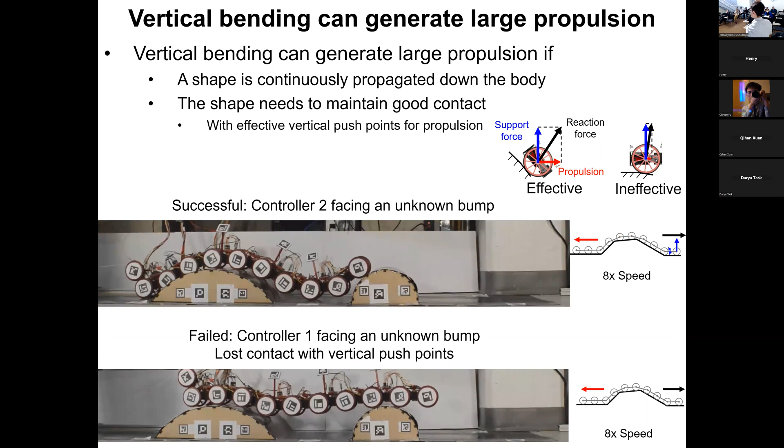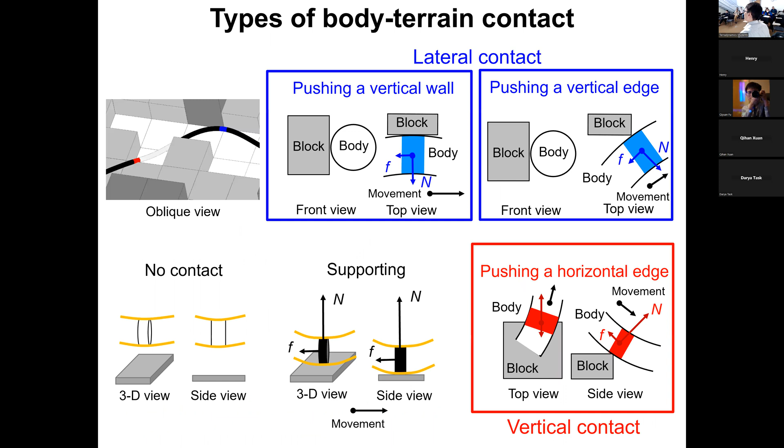So indeed, in our experiments, we observed that the snake moves its head more laterally and dorsally, as if it's exploring a path. And after the head, most of the body simply follows the path generated by the head. I will show you the video once it launches. We also calculated the slip angle for the head region and for the other parts of the body, and we found that the slip angle is significantly larger for the head, which also indicates a potential exploration behavior. But because we cannot measure the neural signals in the animals, we are not able to directly test that. So maybe that's why we added a controller to test it in the experiments.

And yeah, here's a video. As you can see, the head does move a lot more to the lateral side, and also dorsally, as if exploring.